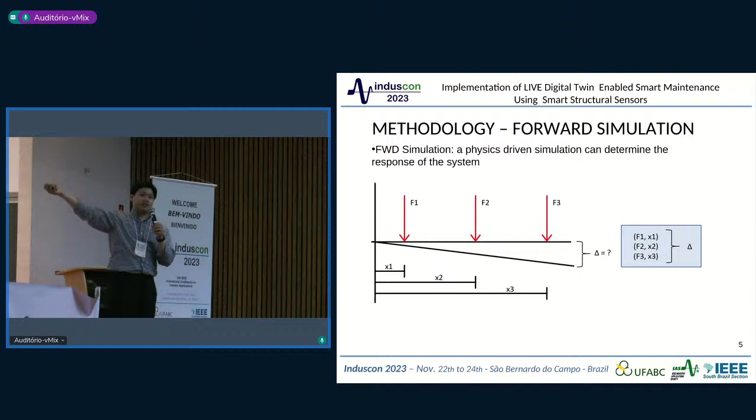The opposite is the backward simulation. This can be achieved using a data-driven simulation or statistical approach. Using sensors from our physical asset, we can collect this free end displacement delta. Through our simulation, we can then find a feasible cause of a combination or singular force at a set of locations on the beam.

So live digital twin, as I mentioned, is a 4-phase methodology, LIVE standing for Learn, Identify, Verify, and Extend. In the learn phase, we collect training data from our real or experimental model, as well as our high fidelity model, and the main goal of this phase is to create this expert understanding or expert knowledge of our system.

In the identify phase, using our prior data, the goal is to create and prescribe this optimal sensor network. I'll talk more about that later. As well as, if necessary, we can develop our low fidelity model. This is very advantageous in the further steps to expedite the fault analysis process.

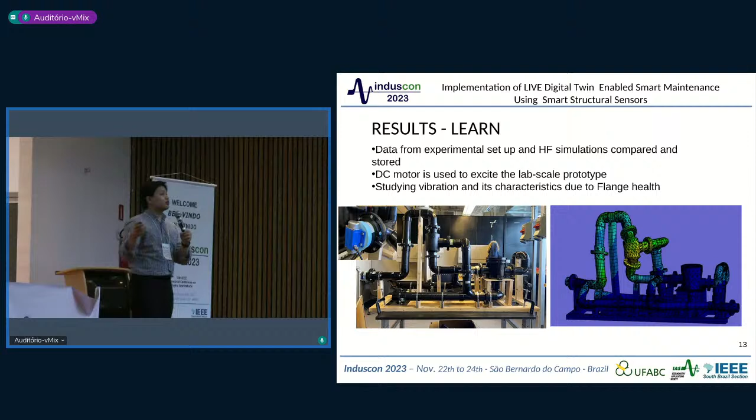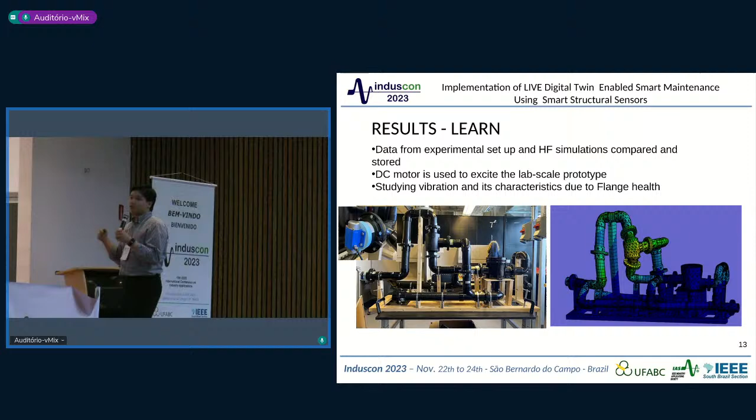So in our lab, we built this small-scale lab prototype of a pipeline system. And the goal is to try and employ all four phases to our system. In the learn phase, we produce the lab-scale prototype as well as high-fidelity simulation. We couple a DC motor onto the lab prototype to mimic the effects of some kind of pump, pumping fluid through our system. So we can then synthesize and combine this data, high fidelity and real experimental, for the future phases.

Just to show how we analyze our data, we collect raw acceleration data in the time domain. Using FFT, we can then convert it to the frequency domain. And we're interested in the natural frequencies where it resonates, as well as the amplitudes of such resonance. And this becomes the basis for our training data set for machine learning algorithms.